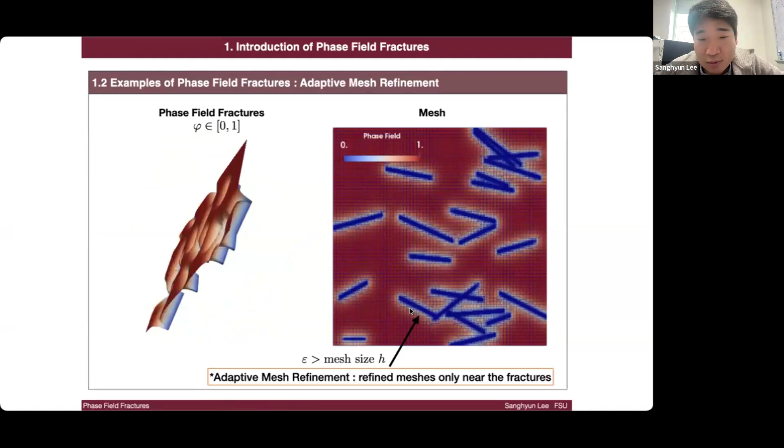So for the phase field fracture propagation problems, I think it is really important to have adaptive mesh refinement techniques. Here you can see we're only refining the meshes near the fractures. Okay, I'm going to talk about this a little bit more at the end of the talk. So now, how do we do the tracking with this phase field?

So here, we can start from this energy functional for the brittle fractures. And let's rewind a little bit back to the interface approach. So let's say this lambda is the entire domain, C is the fracture, and omega is lambda minus C. And this energy functional is now written as the following.

And this is the energy balance between the omega here, which is the non-fracture zone, written with U displacement and total stress sigma of U, here for simplicity linear elasticity, and mu and lambda are the Lamé coefficients. And this is the energy for the non-fracture zone, and it is balanced with the fracture energy as well,

where the energy of the fracture is written as a Hausdorff measure multiplied by the Griffith criterion or fracture toughness value. And a lot of this foundation has been studied by Francfort, Marigo, and Bourdin, and this is the great study of the fracture represented by phase field later on.

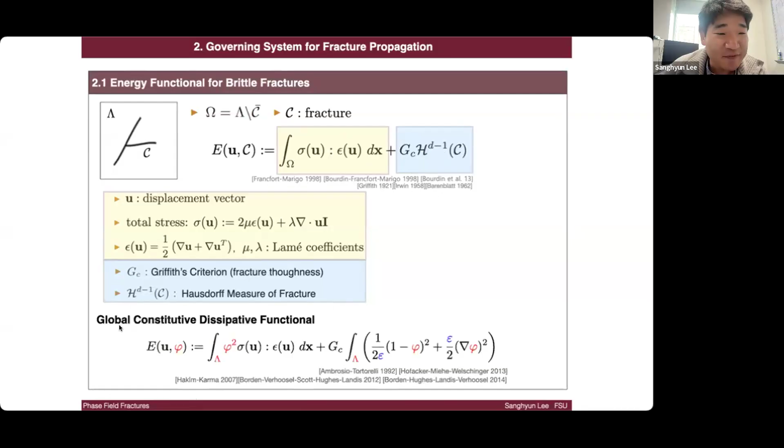So now where is the phase field? Here it comes. Yeah, so we have the global functional form, and you can see a couple of main differences, okay? So now, first of all, instead of using the omega here, we're using the lambda, which is now the entire domain, the global domain. How can we do this?

By multiplying the phase field function phi here. So why? Because recall the phase field was equal to 0 in the fracture. So anyhow, this is defined in the entire domain lambda. When phi is equal to 0 in the fracture zone, this value will vanish. Okay. Same for this fracture energy.

First of all, this Hausdorff measure is now rewritten by the phase field energy here as the following, the Ambrosio-Tortorelli functional, and some good studies have been followed up by Miehe, Landis, Karma, and Hughes as well. So here we can also see that the energy for the fracture is now extended to the whole lambda here,

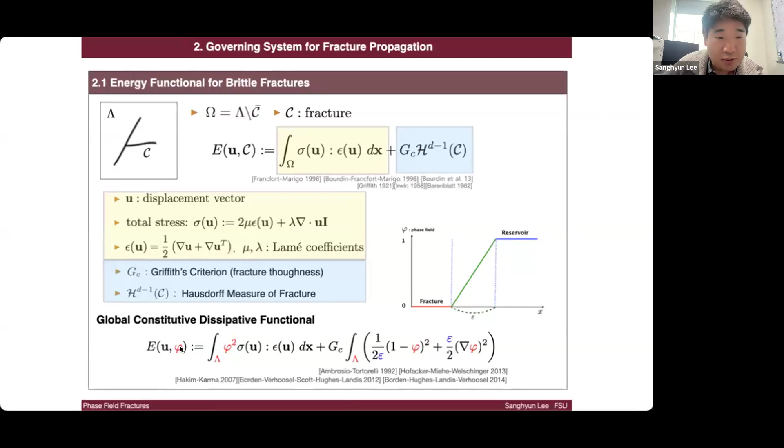the entire domain in global form. But note that in the reservoir, when the phase field is equal to 1, this will vanish. So it is inheriting the energy balance between the non-fracture zone and the fracture zone, but now it's in the global form by employing the phase field values. Okay. So we start from here.

But now we extend to consider the fluid-driven fractures in porous media. The main change is the sigma that we had is now sigma tilde, which was linear elasticity before, but now this is poroelasticity based on Biot's and Coussy's theory. Here P is the pressure and alpha is the Biot coefficient.

So this is the energy functional, which is now coupling the displacement, phase field, and the pressure. So at the end of the day, we're solving this energy minimization problem, right? But we have a constraint.

And this constraint is called irreversibility condition, where we only allow phase field to decrease in time, which means phase field value changing from 1 to 0, which only means the propagation. But I hope we don't get confused here. So it doesn't mean that we cannot consider fracture closing.

Right? Fracture propagation is not the same as the opening. So fracture opening and closure are handled by the width, not the phase field values. A phase field is just the indicator of the fracture path or the fracture zone here.

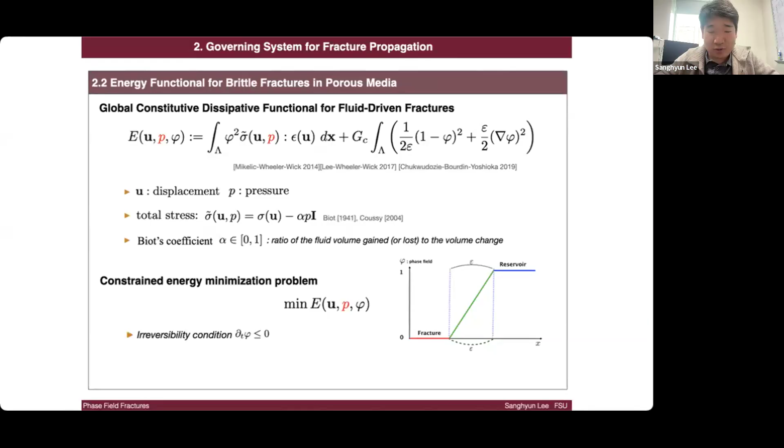Okay. All right, so now how do we handle the pressure? So we have a Darcy's law. I don't think I have to talk about Darcy's law with this audience. And this Darcy law will lead to the conservation of mass equation, now which is coupled with the mechanics as a poroelasticity system. Again, the Biot poroelasticity theory here.

Here, the porosity is now written as 1 over M P plus the divergence of U, where U was the displacement. So now this is the coupled parabolic PDE type of the fluid, which is now defined in omega R. Omega R means the reservoir zone, okay? Now, how about the fluid in the fracture zone?

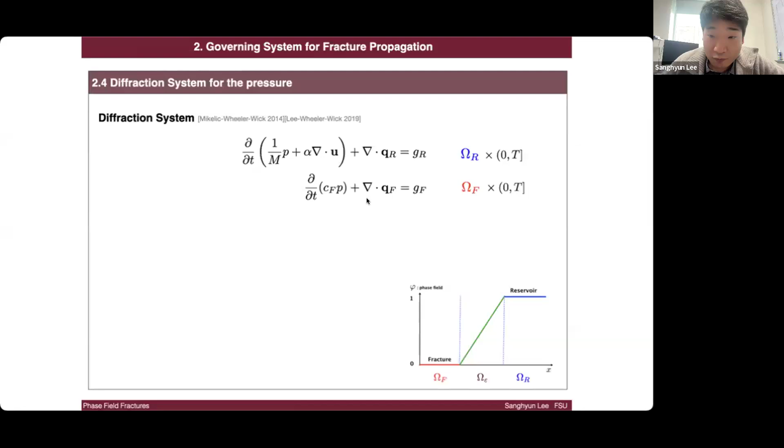So in the fracture zone, we still have the same Darcy flow type conservation law for the fracture flow. But now the difference is that we have different physical coefficients. And more importantly, we do not have any coupling with the displacement in the fracture flow by assuming the porosity is equal to 1. Moreover, the permeability is different.

In the reservoir, the permeability is given as the given data, but in the fracture, the permeability has to be computed, which is based on the width computation over here. Okay, I'll talk about this more later. Next, how do we separate this omega R and omega F? Again, by using the phase field, right?

So for simplicity, we can just assume we're multiplying phi to everything in omega R, 1 minus phi to indicate the flow in omega F. For example, if phi is equal to 1, this is alive, this goes away. And phi is equal to 0 in the fracture, this goes away, this is alive. And in the mixture, we have an averaged flow in between omega R and omega F.

So roughly speaking, we're getting the interpolated pressure values between PF and PR through the given phase field. I will not go over too much detail, but for more rigorous studies based on lubrication approximation for deriving the Darcy flow system from the Stokes, the imposed interface conditions, and leak off, you can look over these papers for more details.

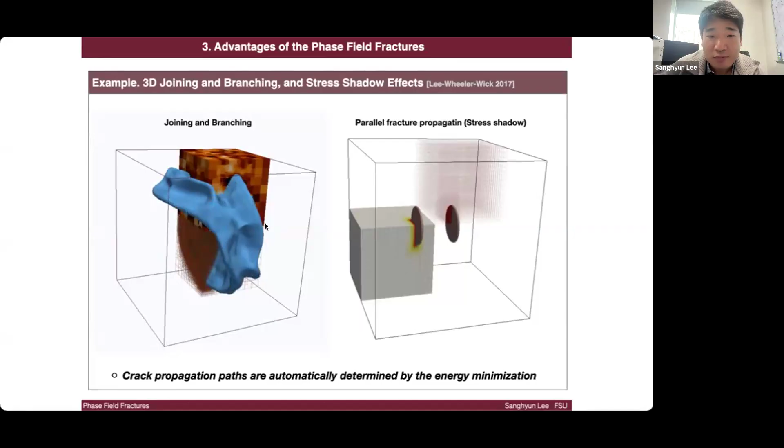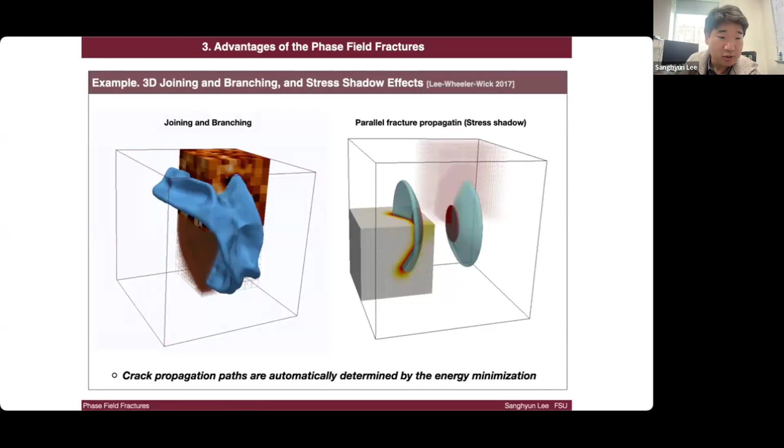Also on the right, this is the famous stress shadowing effect. When the fractures are too close, I'm injecting the pressure, and you can see fractures interact and they curve out while they propagate. So one main advantage of the phase field is that the crack propagation is automatically determined by the energy minimization. We don't need to compute the stress intensity factors or give any ad hoc laws near the crack tip. We don't even have a crack tip here to determine the fracture propagation. So that's one of the advantages.

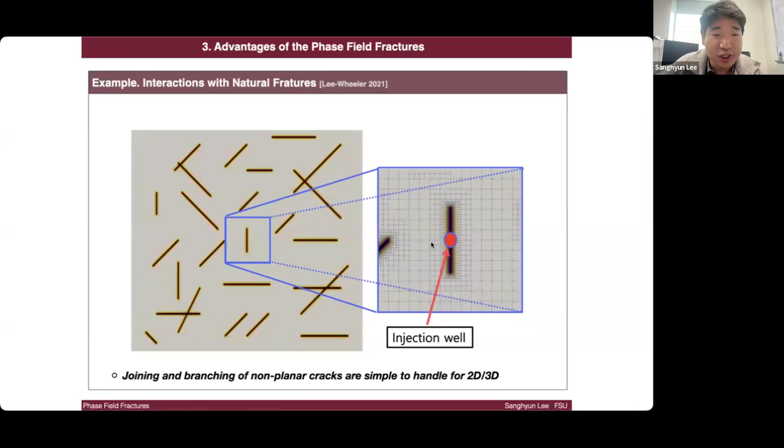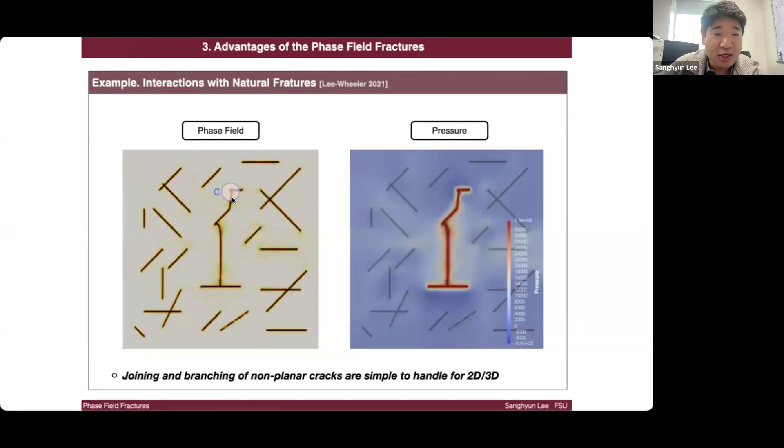So here's also one 2D example where we have several natural fractures. You are looking at the phase field values, which I showed you at the very beginning. And now I placed one hydraulic fracture in the middle, and I'm injecting the pressure. You can see the phase field value on the left, pressure on the right. When it's hitting the natural fracture, it's accumulating the pressure again to propagate, meeting over here at B, meeting again here at C. And overall, you can plot the maximum pressure values in the entire domain.

And you can see the pressure peaks and it goes down whenever they interact with the natural fractures. And you can actually turn off the injection to see the flow back. And we have done some of these types of studies by looking at the interaction with natural fractures as well.

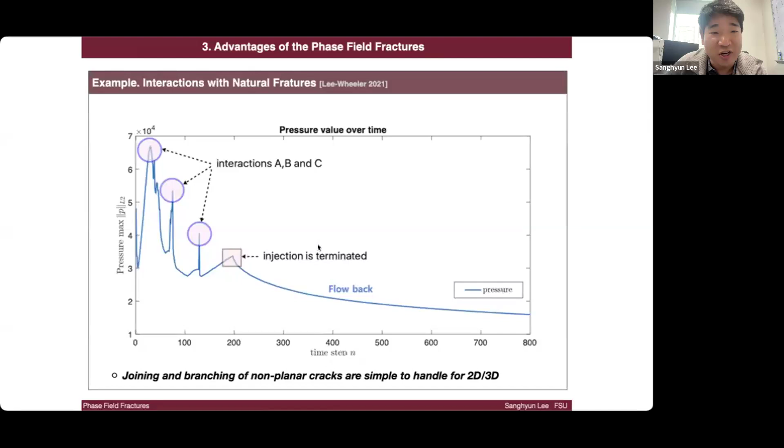All right, so what do we have as challenges, okay? For computing all these examples, what did I do? What were the hurdles? So first, to solve this constrained energy minimization problem with irreversibility condition, this is an optimization problem, we have used the Newton primal dual active set method. In our previous publications, we also used simple penalization, augmented Lagrangian in some other works, but we found that this active set method is quite efficient and works well, including a 3D example.

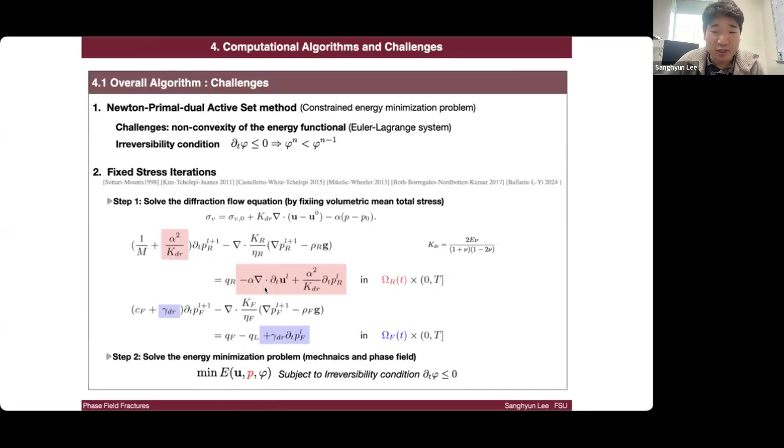Next, to couple the flow and the minimization problem, we used fixed stress iteration techniques. The idea for the fixed stress is to fix the volumetric mean stress while solving the pressure first, and then solve the mechanics with a given pressure. Okay? And we iterate until it converges, right? So here, this is a 3D example which shows a 3D fracture propagation. And this is the number of fixed stress iterations over time, which shows that it's quite stable overall.

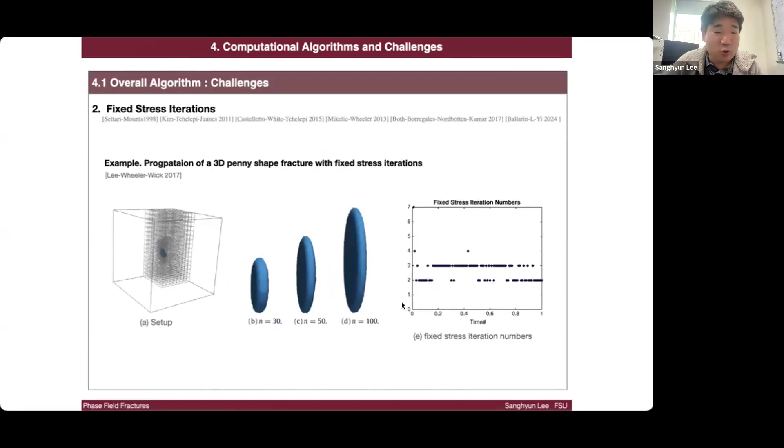For the adaptivity, here we use this predictor-corrector mesh adaptivity idea, which was initiated in this paper. It's simple. We first solve the fracture and see where the fracture is heading. And then we go back and recompute after we refine the region where we know the fracture is going to propagate, and we do this for each time step. So we can keep epsilon larger than h, and refine only near the fractures. For detailed studies of how this is efficient in computational time and so on, please refer to these papers.

Okay, so furthermore, we saw some advantages of this diffusive approach, hopefully, but this is actually one of the main challenges in the phase field as well, because of this epsilon. We have to be careful choosing epsilon from several perspectives. First, from a theoretical perspective, we are based on gamma convergence, which provides baseline theories showing the diffusive fracture eventually converges to the interface zone. At the same time, the choice of epsilon is important for numerical studies, because epsilon can depend on h, the mesh size. And whenever h is decreasing, we want to make sure you have convergence in your energy as well, right?

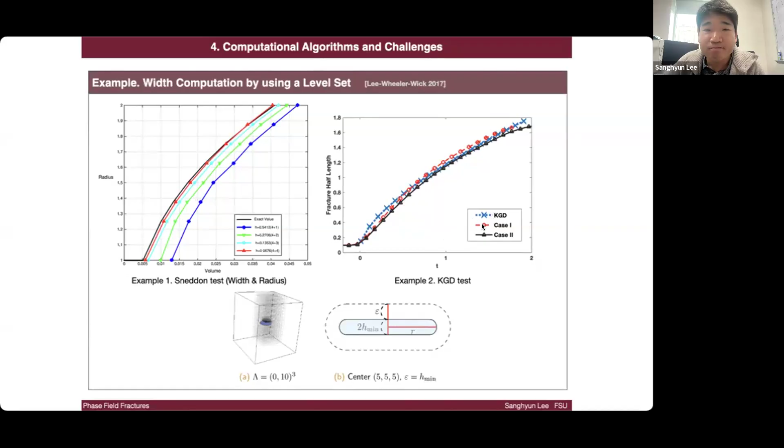So for all spatial discretization, I use finite element methods, okay? And if you're in the finite element method world, there are a lot of numerical instabilities which often arise, especially when you're doing a multi-physical system, coupling mechanics, pressure, width, phase field; nothing is going to be obvious. You have some implicit conditions to consider: maximum principle, locking, local mass conservation, and such, right? So this time, I only want to focus on local mass conservation.

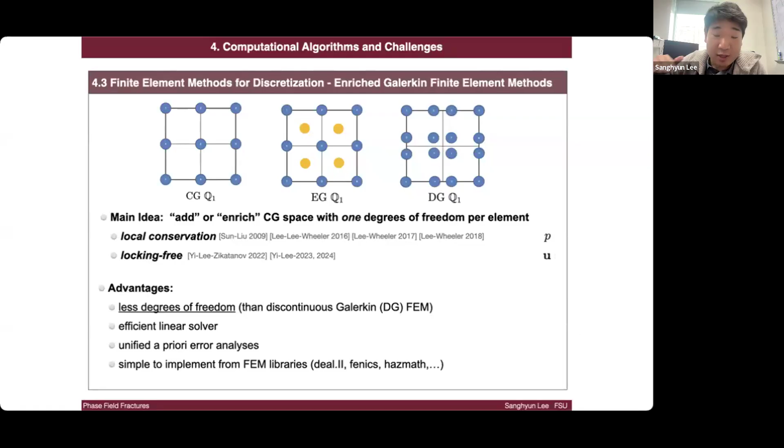And then we are using this enriched Galerkin method to discretize my P. For the displacement, I'm not adding a constant, I didn't bring it here, but we are adding a specific vector per element in the displacement formulation, so we can ensure it's locking free. The advantage of enriched Galerkin is that we have way fewer degrees of freedom compared to the discontinuous Galerkin method, which is another popular one to ensure local mass conservation and locking free. It's all good, but I think it's just too expensive for satisfying these properties. So I think EG is the cheapest in terms of providing these physical properties in the finite element framework. So this is what we use.

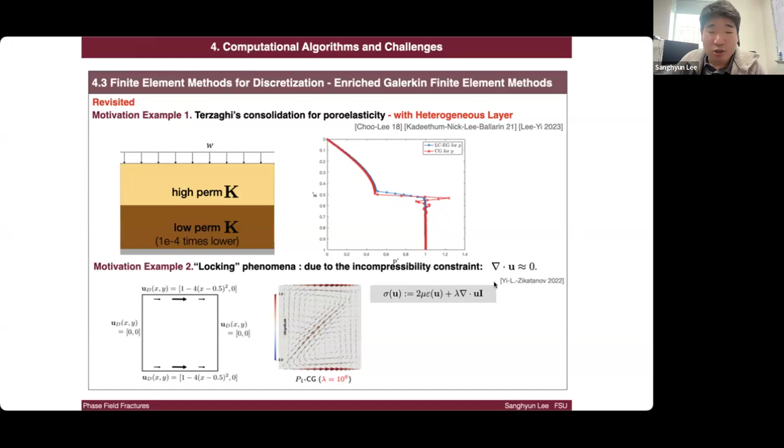And then if I revisit this example, we don't have oscillations with this enriched Galerkin method. And briefly speaking, we don't even have the locking phenomena for the mechanics. Locking is the thing which happens when your lambda is large, or Poisson ratio is going to 0.5, and the material becomes incompressible. So we can get over these issues when we have a multi-physical problem. These EG methods are one of my main fields. This has been applied to different types of physics in recent years. So if you're curious, please take a look.

So I think another advantage of this phase field is that it is easy to extend to include other physics, because it's based on a continuum approach. And coupling with other applications is also not too complicated, because passing along the phase field value is just a scalar function, right? And it's also very diffusive.

So let me show you some of the works where we have put some efforts in coupling different physics and with different applications, right? So on top of what we had, like phase field, displacement, pressure, width, all the numerical algorithms, enriched Galerkin method, now we can couple with the transport equation to consider proppant concentration in the fractures. Here we're using this nonlinear fluid based on the power law, and we can try to find proppant transporting

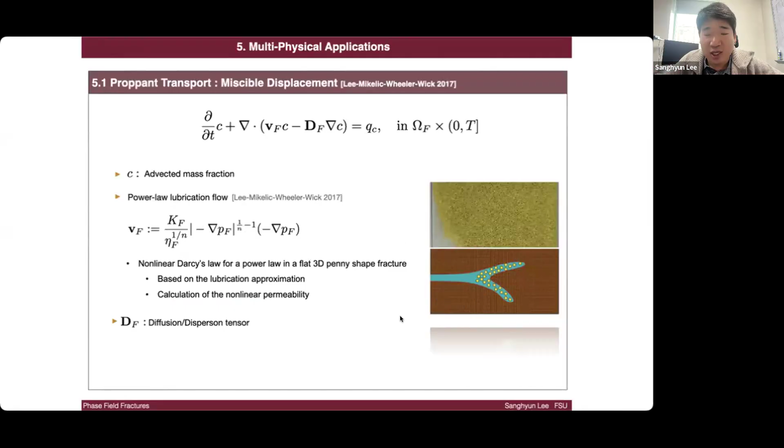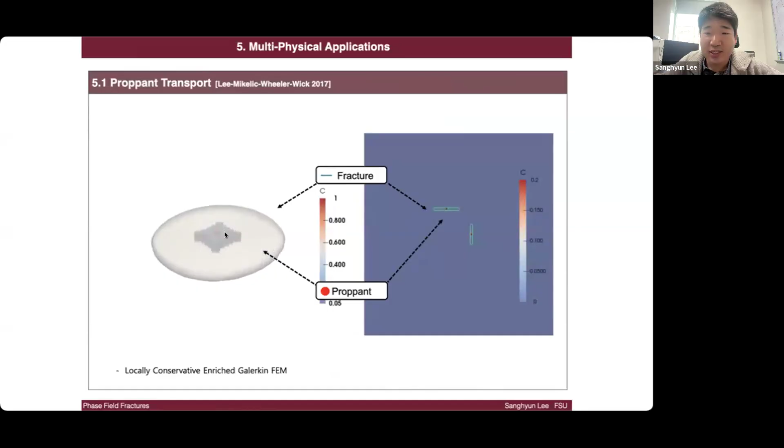in given media. So this is an example of the transport viscous fingering with our enriched Galerkin method and adaptive mesh refinement techniques. And this was imported to our phase field fracture propagation in early time to see the proppant transport inside the fracture in a 3D penny shape. Also we have two fractures joining and branching, and you can track the concentrations and so on. Okay.

We also have extended the model to consider two-phase flow by adding the saturation. A lot of mathematical work has been done in this paper to have the relative permeabilities, capillary pressure in the fractures, and so on. And here's one example that we had in the past. So this is a large domain. You're looking at the phase field values. The natural fractures were given by this microseismic data.

And I placed 3 hydraulic fractures in the middle of this domain. And we're injecting, and we're doing some multi-stage fracking. So you're looking at the pressure values on the background. You can propagate the fractures, and they can join, and they can merge. This is what we have done using our simulator.

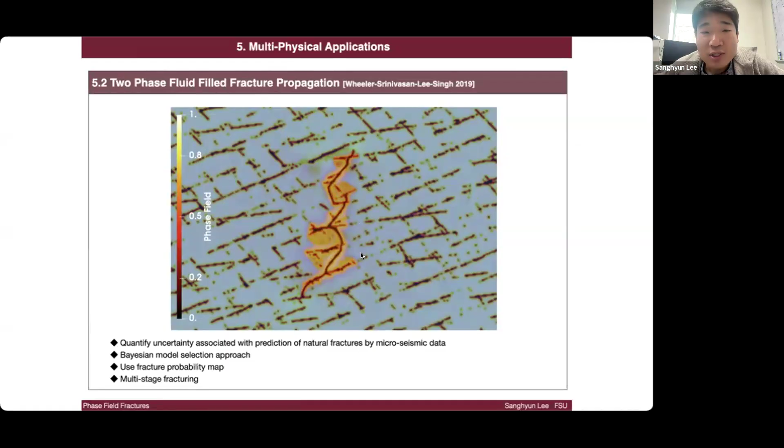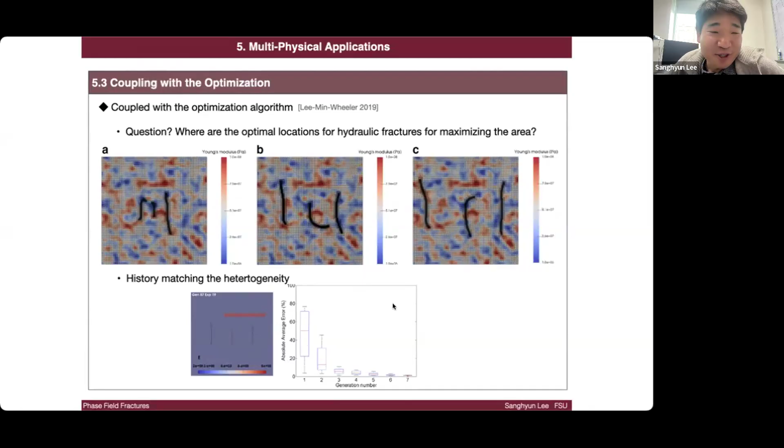So also we coupled with optimization techniques. For example, can we try to find optimal locations or the distance between the pair of fractures to maximize the production in heterogeneous media? This has been studied in this work. And also we can perform some type of history matching to find the given heterogeneity in the domain with the fracture profiles. I think we can do way better work nowadays using machine learning and so on.

So this is one of the most recent works where we have considered THM fractures for targeting enhanced geothermal systems. The difference highlights the total stress now includes the thermal effects, which is the theta here, following the Biot poroelasticity theory again. So we can also employ the diffraction system for the energy balance equation for the temperature. But we have linearized some terms inside the time derivative for simplicity, okay?

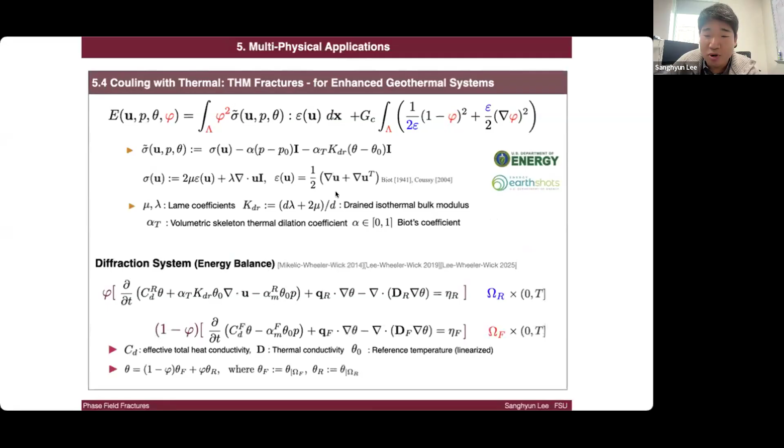But this is a fully coupled process between temperature, pressure, and the mechanics. Here we also have the coupling temperature terms in the pressure equations as well. Okay. Then this example shows one scenario of enhanced geothermal system where we have some natural fractures and injection production wells.

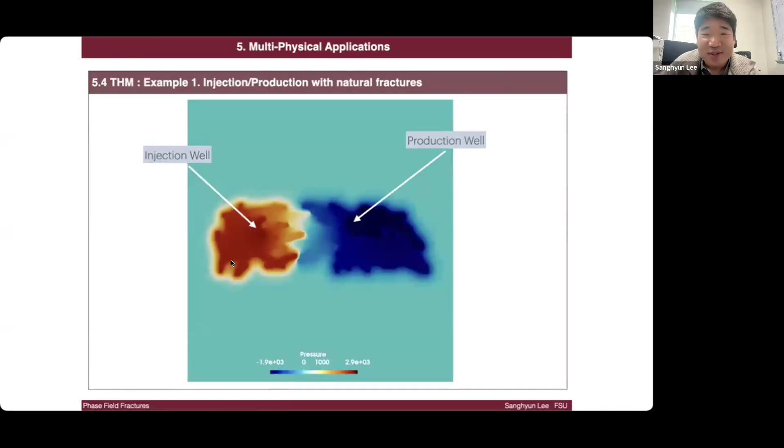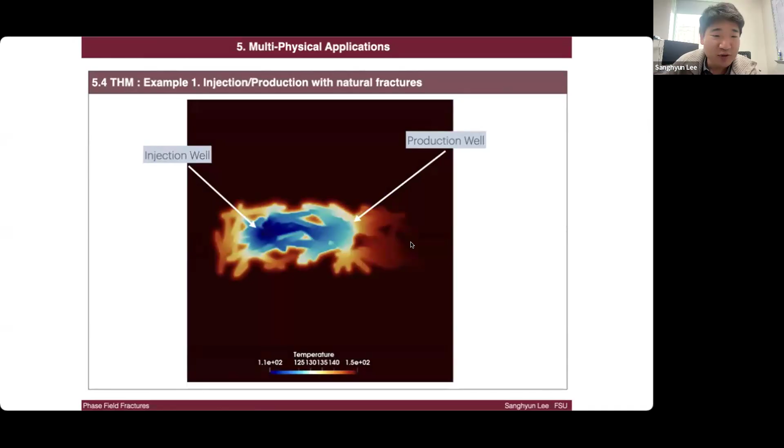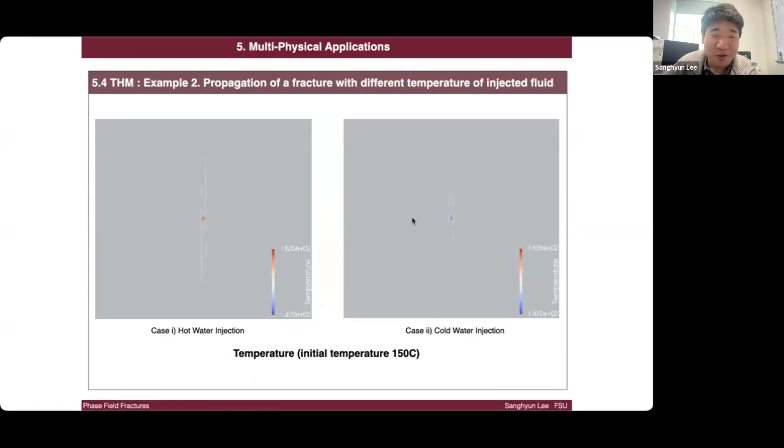You will see the pressure moving on, but now the difference is here: hot water injection and cold water injection, okay? It's hard to see the difference at this scale, but if you zoom in, you can actually see the difference of the fracture length. You can see a little bit more propagation whenever you're injecting the cold water because we have a little bit more opening of the width. And I don't think this is a big surprise. I found some papers that have similar findings from lab experiments and field tests as well.

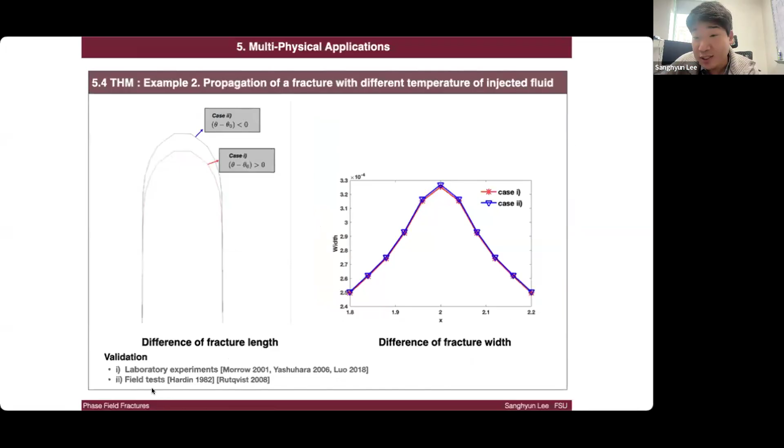And also, this is not magic, right? This is definitely due to the modeling perspectives. What happened here is due to the interface condition that we impose. In the interface, we have to impose certain conditions, and sigma tilde is the whole thermoporoelasticity thing, which we have in the reservoir domain. And then sigma F is the total stress that we have in the fracture.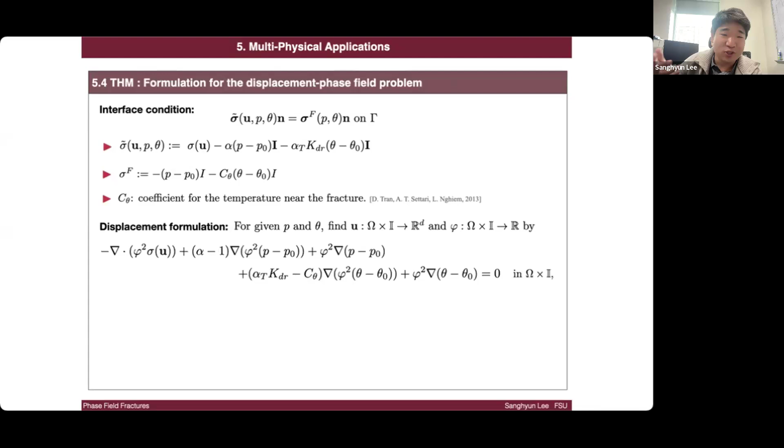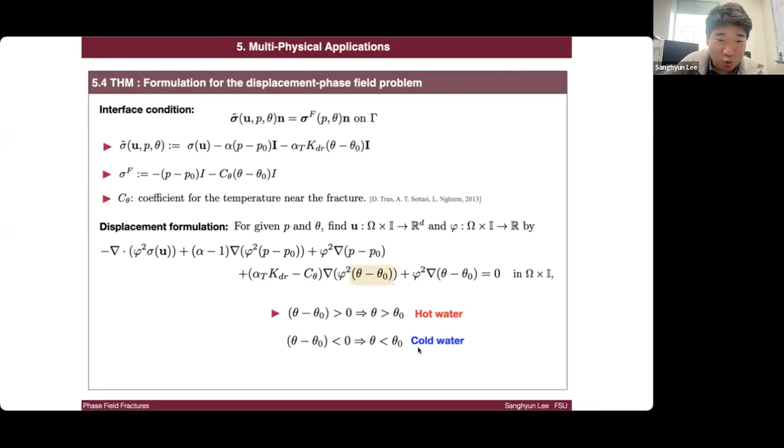So we don't have the mechanics, and we have the specific coefficient of the temperature near the fracture following this Settari's work. From here, if you try to write down the displacement formulation, before we go into the weak form, the thing is we have this theta minus theta 0, where theta 0 is the residing or reference temperature. And the sign of this term can change whenever you're injecting hot water or cold water. And this is the reason it makes the difference.

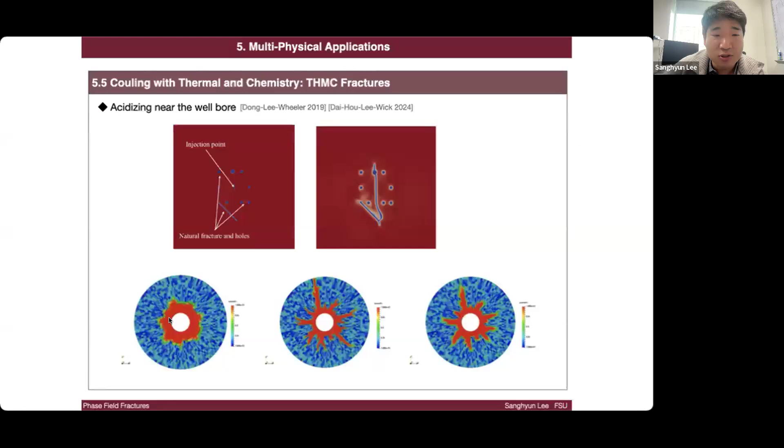Furthermore, we also have extended to couple the chemistry, like THMC. But first, this page is mostly focusing on the acidizing near the wellbore. I just brought a couple of numerical results. We have compared with some experiments, and we have tried to look at what happens to the acidizing near the fracture, near the wellbores and so on.

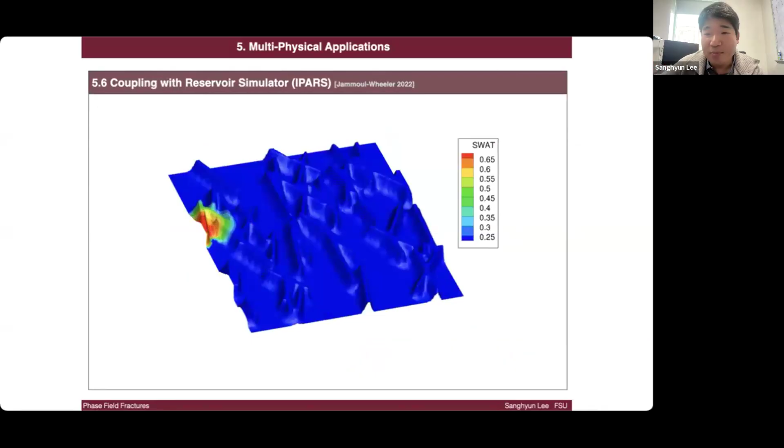This is the work which has been done by Mohammed, who's now in Exxon. We have tried to couple this IPACS, which is the name for our phase field simulator, to IPARS, which is our UT Austin in-house reservoir simulator. So we don't have to reinvent the wheel for the compositional flow. I know how complicated that is. So we try to couple the framework. Here, the propagation of the fracture is not considered, but you can simulate and present the saturation of the water.

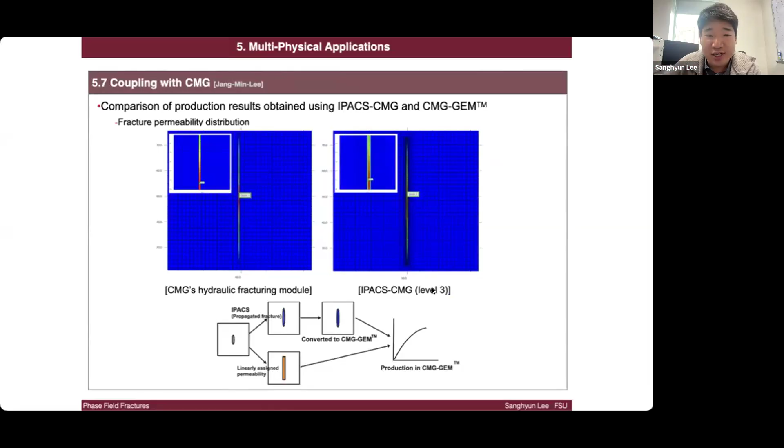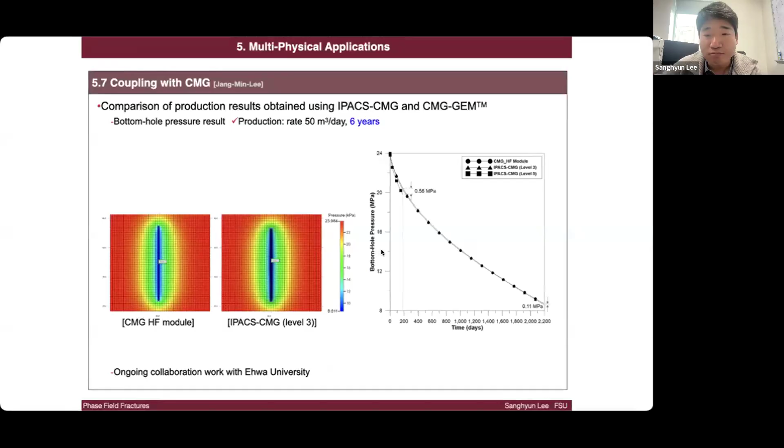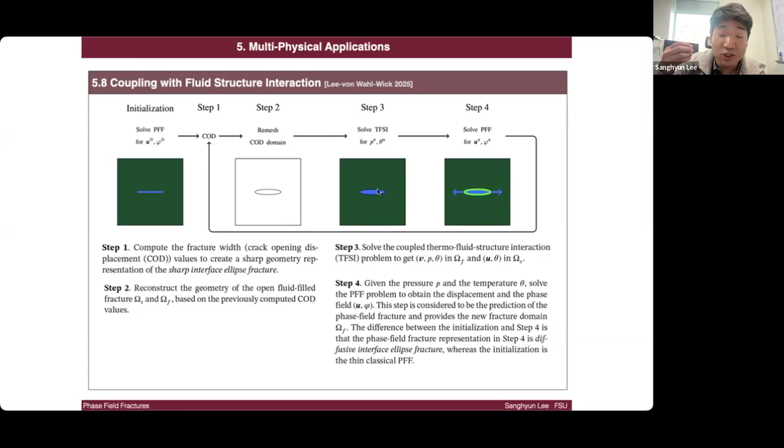Lastly, we have coupled our IPACS, the phase field fracture, with fluid structure interaction to study the width problem more carefully. This algorithm suggests that we first compute the width from the phase field, as I told you some time ago, and then we can reconstruct the geometry based on the width deformation. And then with this new geometry, we can try to solve this FSI, fluid structure interaction problem, by considering Stokes fluid inside, not Darcy anymore.

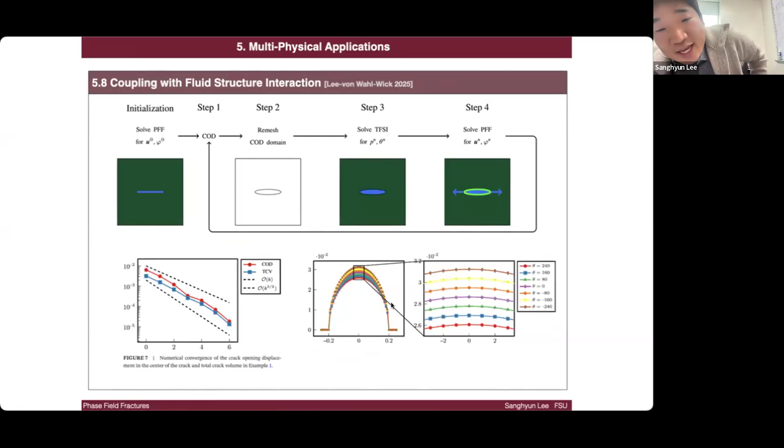So let's conclude. I hope I didn't go through it too quickly, but I didn't want to use too much time this morning. I didn't go through too many details, but I tried to showcase a little bit what phase field can do and what some of its advantages are. So I hope I could demonstrate some potential of this phase field approach for treating some practical applications.

To summarize the advantages, we have these high fidelity numerical methods. It's a continuum and diffusive approach, so it's easy to extend and handle multiphysics, in my opinion. And the fracture propagation is driven by an energy minimization problem. I think this is an advantage. Definitely we have some limitations as well. High fidelity means computational costs are expensive, but I think we pay for what we get. And still, we have many challenges to discover, which can be some future directions.

Some research that I thought was very interesting in recent years: the phase field community is looking at fracture nucleation, or how to initialize the phase field fractures. And this is quite an important thing in the phase field fracture community. And some scaling issues, this epsilon h: how do we handle large scale fractures? Or do we need more physics, like shear fracture and so on? And there are some more benchmarks that we want to match and compare.

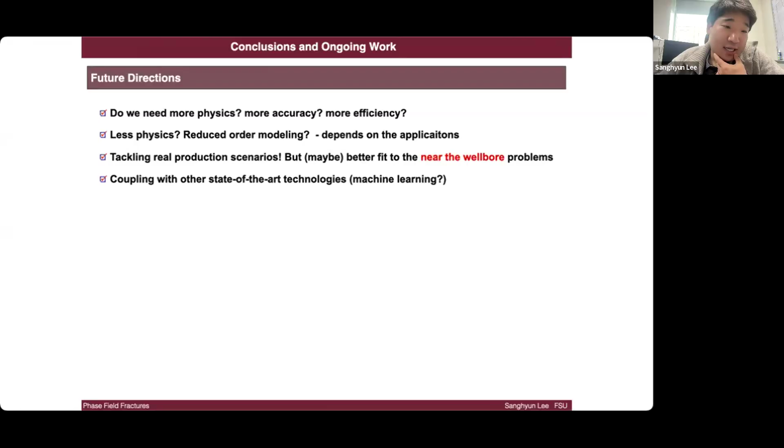Some simulation that I've done might be a joke for you in engineering, but I think this phase field can better fit the near-wellbore problems. We have very precise fracture representations, and coupling with machine learning can expedite the process. This whole code is based on the finite element library called deal.II. IPACS is the name of the code that we have.